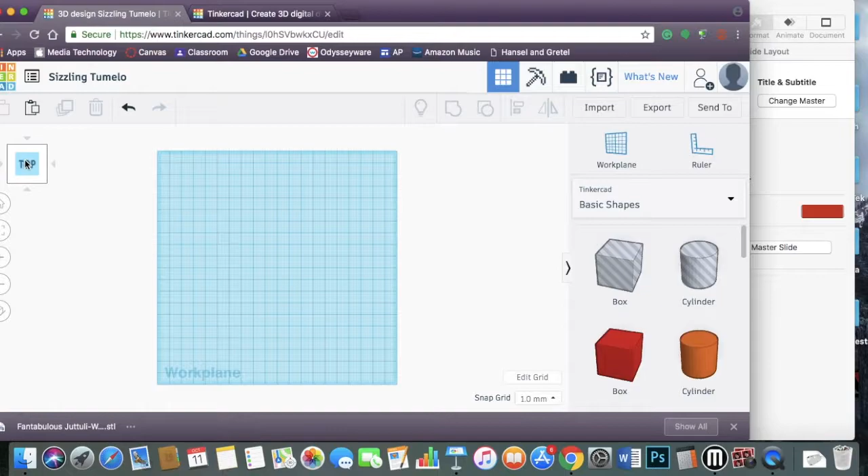So right here, I'm going to show you how the software runs. Here's your viewing thing in the top left. You can see how you can change how you want to view your platform. And then here's just some basic shapes.

There are also other options which Steven and I didn't figure out until late in the project, so all of our designs are pretty simple. But yeah, so we just used the basic shapes.

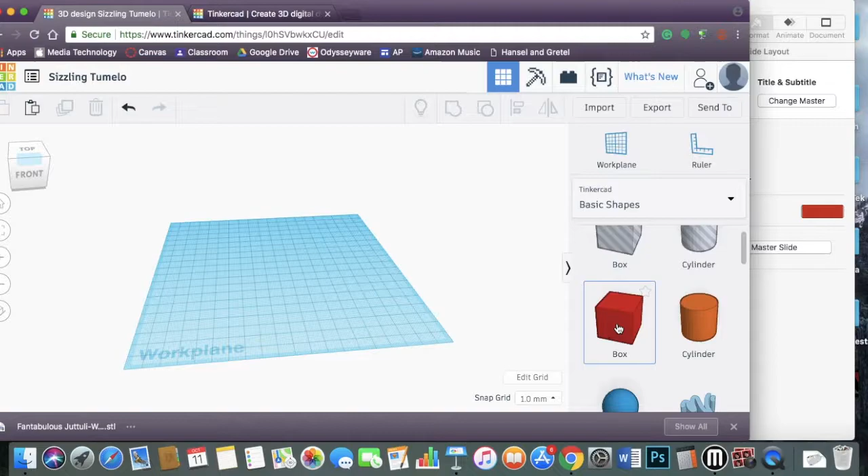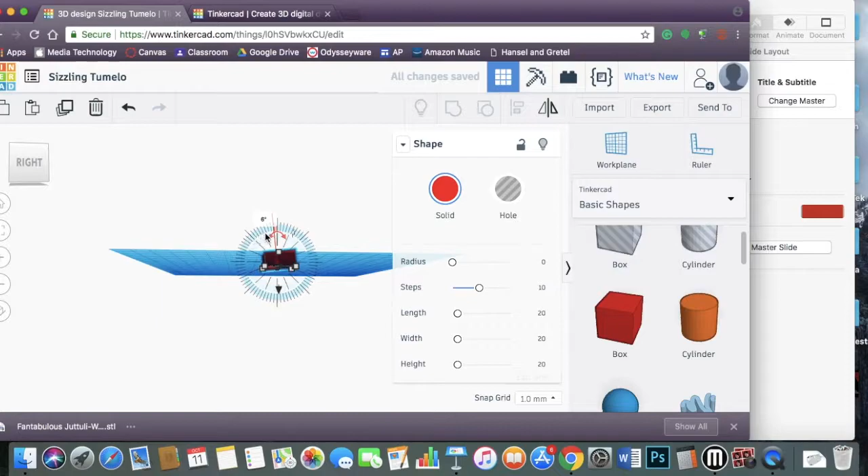So here, if I put a box down, I can adjust the height and settings of the box using these little tools. And then these can rotate the object or the design. So if I want it to be sideways, then I can do that.

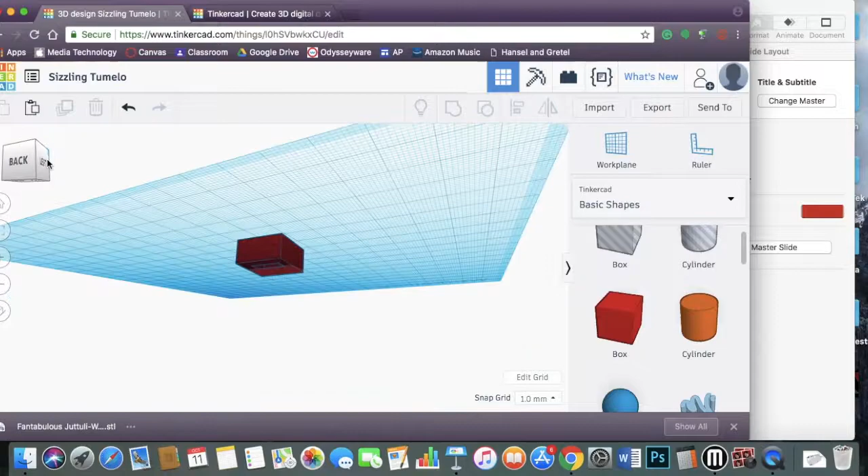Also, which was important, I need to know how to make holes, so I can make this a little smaller than that and then put a hole in this design. So when I group it together, it'll show in here what the design will look like, which is a little bit odd because I rotated it a little bit. But that's what the printed thing would look like. And if I want to edit it more, I'll just ungroup it again.

And that's pretty simple. Another thing you could do is scribble, so you can write your own things. If you wanted to put your initials or something there, you can put that there. I didn't use that as much because it's not very helpful.

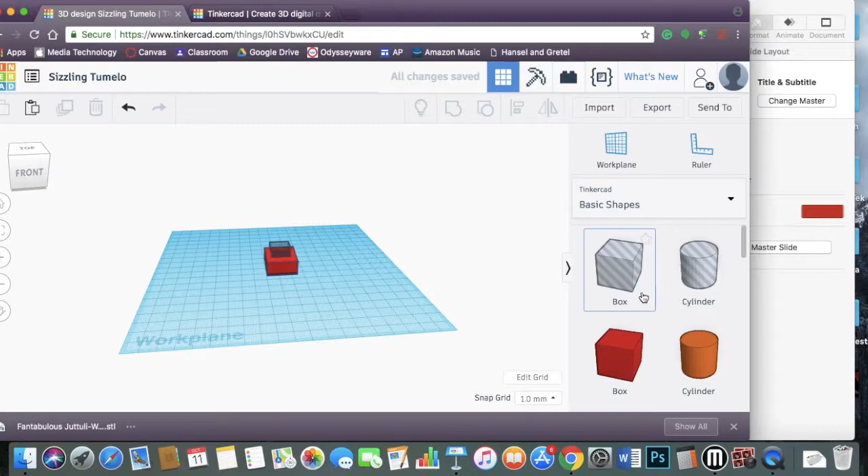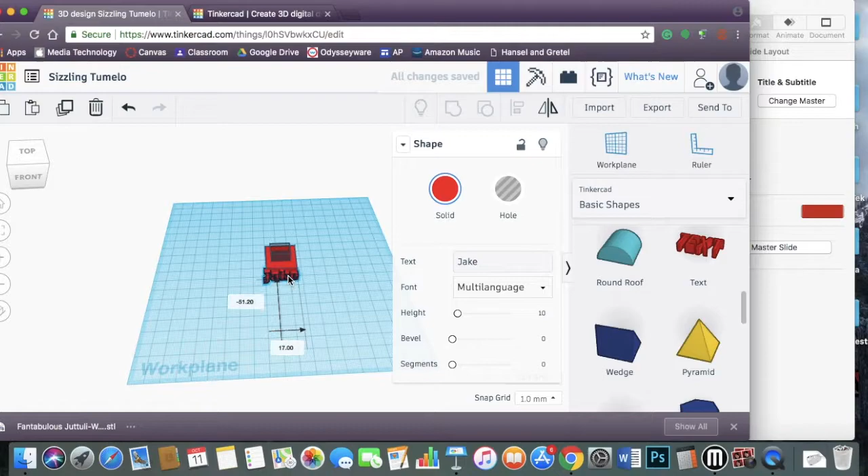Another cool thing is you could put text into the design. So if I wanted to put my name on this, I could do that, choose a font, and then rotate it. Maybe adjust the size so I can fit it on this box. And so it'll print like that. That was a pretty cool aspect of it.

Another cool thing you could do is import designs that other people made. So if someone made something like a flame that I wanted to put in this and make a fireplace, then I could do that. I could take their STL file and import it and just drag it in here, and then it'll show up there.

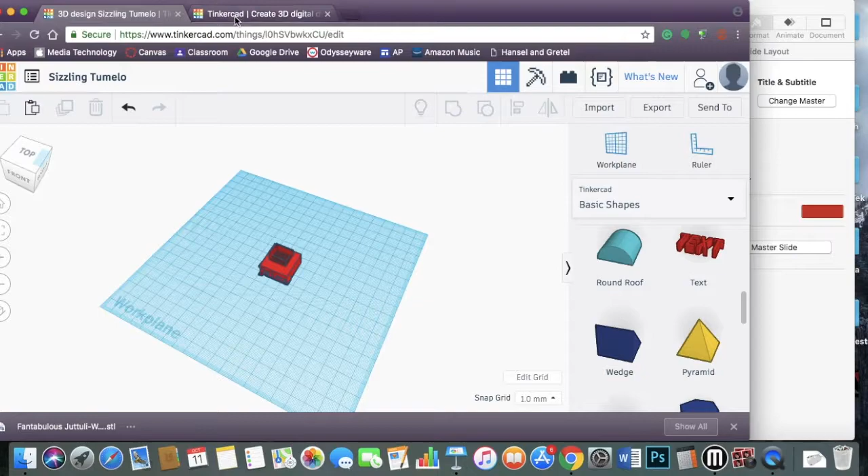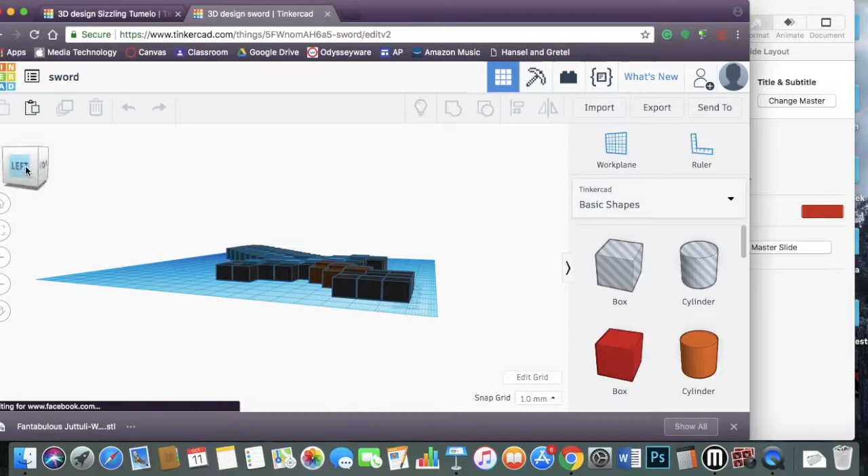So here are some designs that I made. These are the two that I ended up printing. Here's the first one. This one was a pretty simple design because all I did was use the simple boxes and then adjusted the height of them, and it just came out like that because I looked at the design beforehand to make sure I wasn't screwing it up.

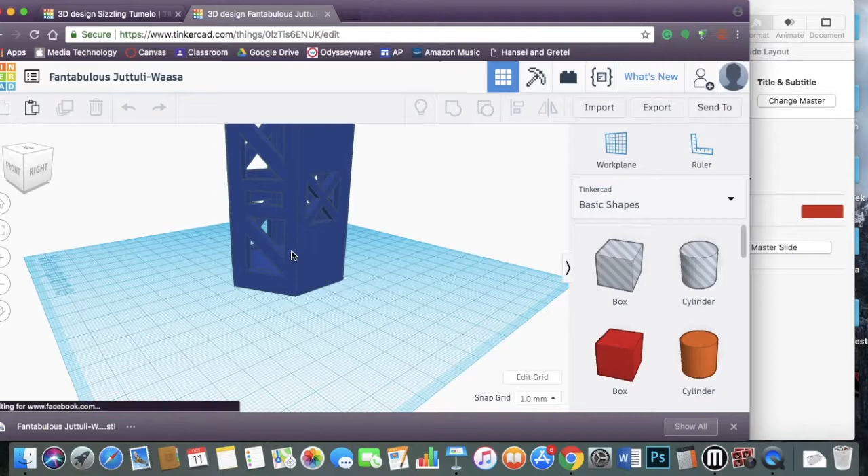And here it is. And then my other one was back here. Here it is. So this design was originally meant to be a lantern that I could put some LED lights in and it'll glow up. But the LED lights eventually broke, so I just made it a pencil holder. And here's how I did it.

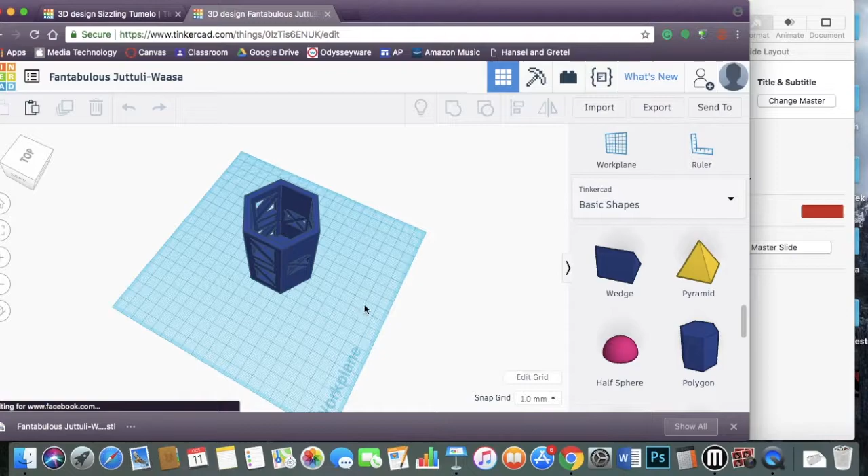So I started out with a basic polygon and then put a smaller sized hole of a polygon inside that, so it was hollow. And then I created some designs and put them on the side, making holes so it would be hollow there too. And if I group them together, I can see what the final thing would look like.

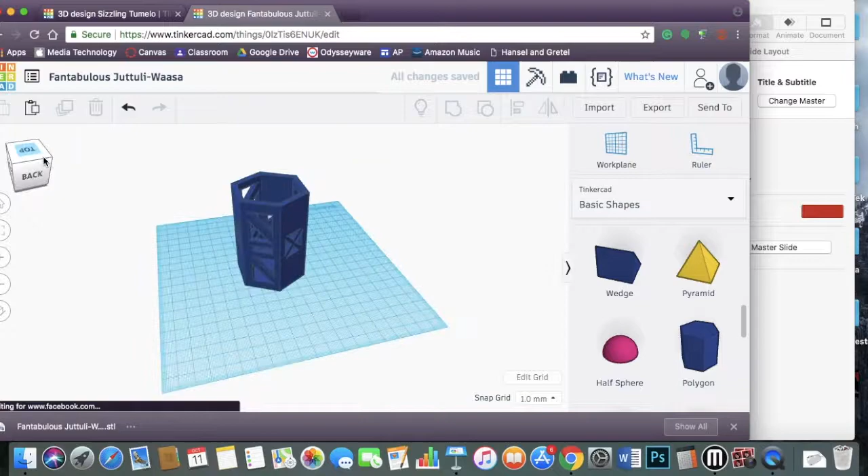Here's this. It was pretty simple because, again, we were using basic shapes, and I probably could have delved into more complex things. But there's that. And so when I want to print it, I just export it.

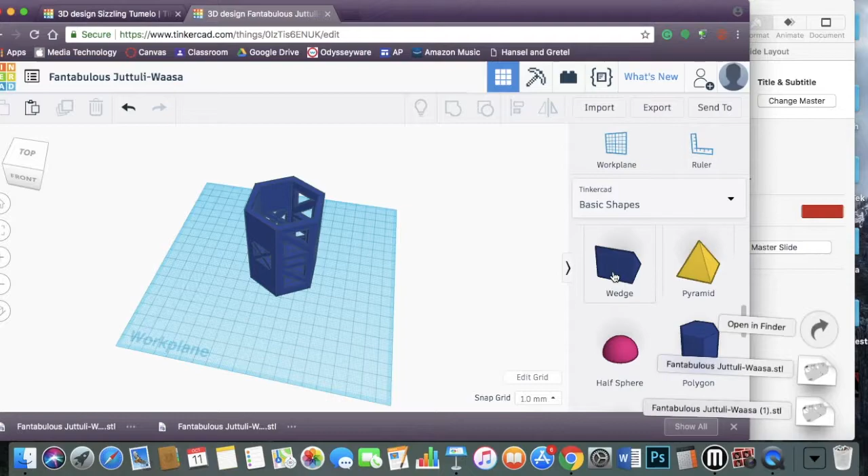And the file that our printer reads is STL, so I want to export it to the STL file, which I have done. So what I do after that is go to Makerbot Print, which is what our printer uses, and go to the project panel and upload my STL file into that, and then it'll show up here.

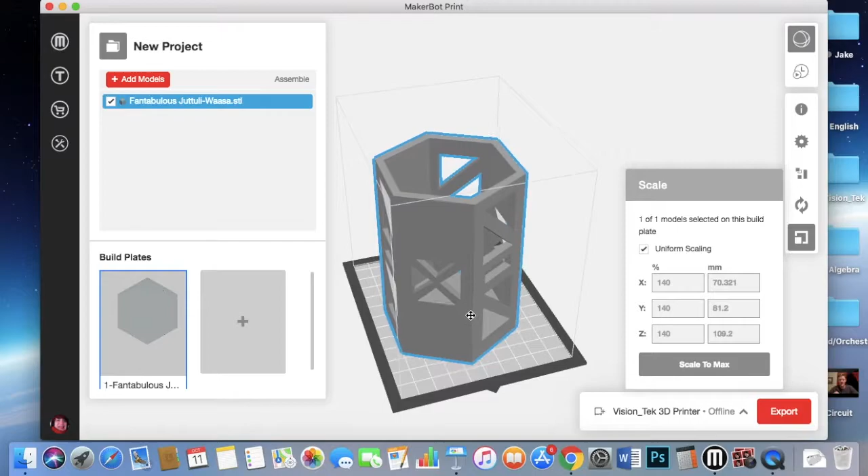So from here I can edit the size of it, so if I wanted it a little bit bigger I could do that. And all I have to do there is press print, which it doesn't say there now because I'm not connected to the printer. So that's pretty simple, and then it'll end up looking like this.

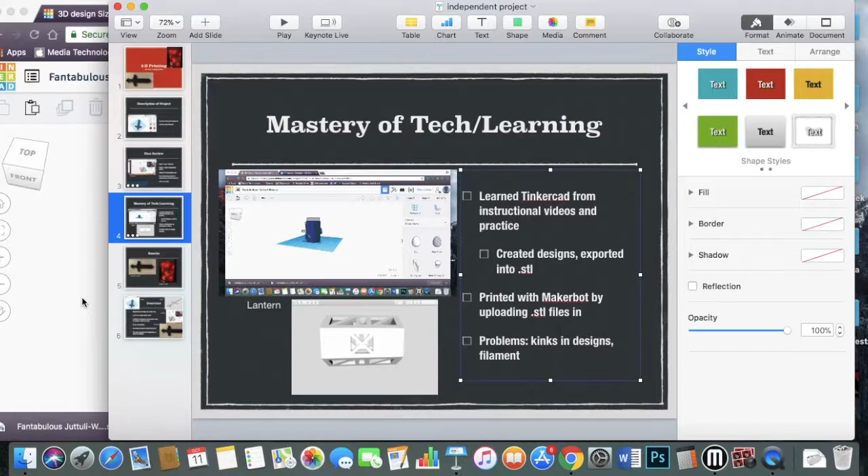So that was my project. If I were to redo my project, I probably would have talked more about what I learned when I first introduced it, like showing a video of me making this and watching it for a while. I also would have tried to do more designs, maybe more complex things. Again, we didn't learn how to use other shapes. But yeah, I think it went overall pretty well.